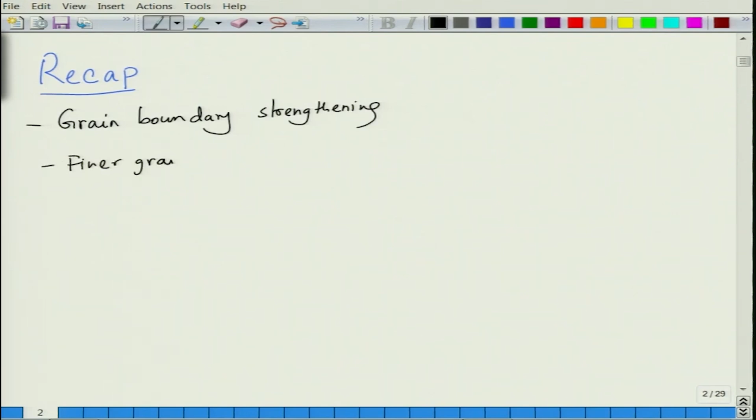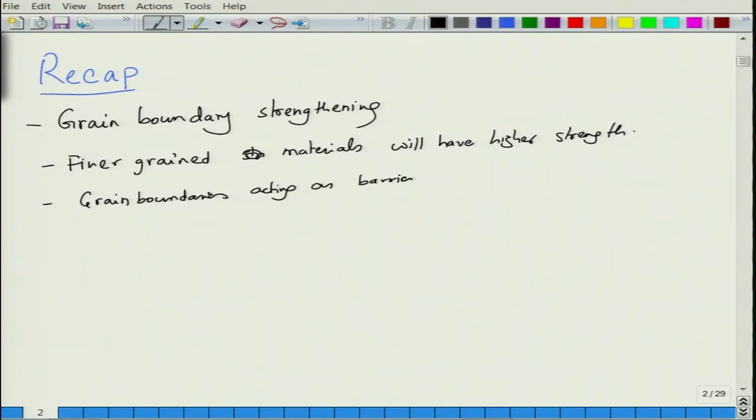In the last lecture we talked about grain boundary strengthening, in which we said that finer grained structures, finer grained materials or metals will have higher strength, and this is because grain boundaries act as barriers to dislocation motion.

This is because when you have a grain boundary, and if you have a dislocation moving on this slip plane, the dislocation does not find a continuous slip plane. So the slip plane in this case could be like this, but the dislocation does not find a slip plane, it has to go from there to there, and that does not happen because they are not continuous. As a result there is a discontinuity in the slip plane.

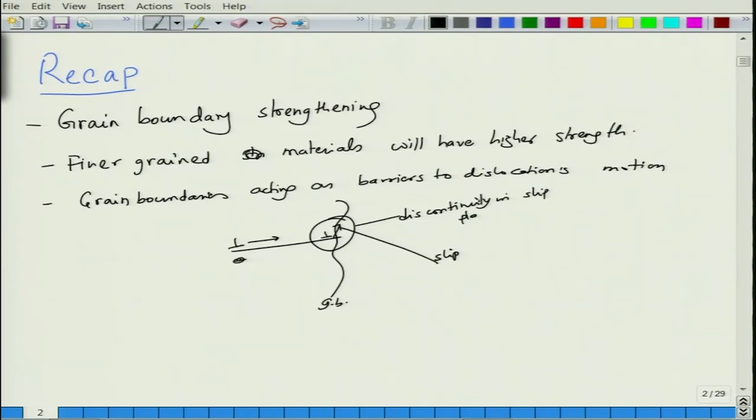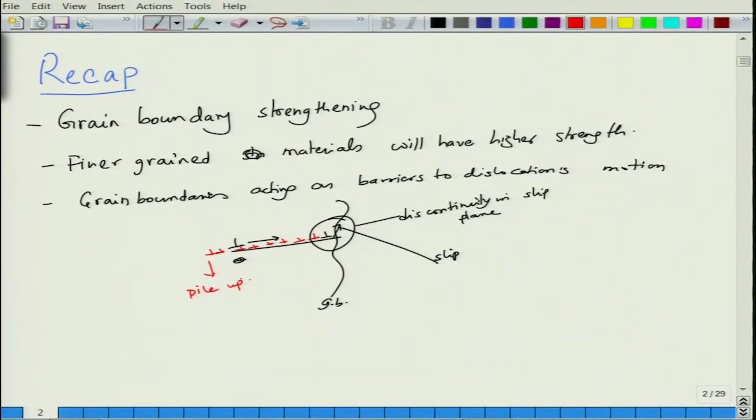Also, even though it was continuous, it could have been at a different angle, so the resolved shear stress could have been different. Basically this leads to, if you keep doing it, a pile up of dislocations here like this. This pile up again leads to increase in stress because you are piling up similar dislocations, so there will be repulsion between the dislocations as well, and this leads to strengthening.

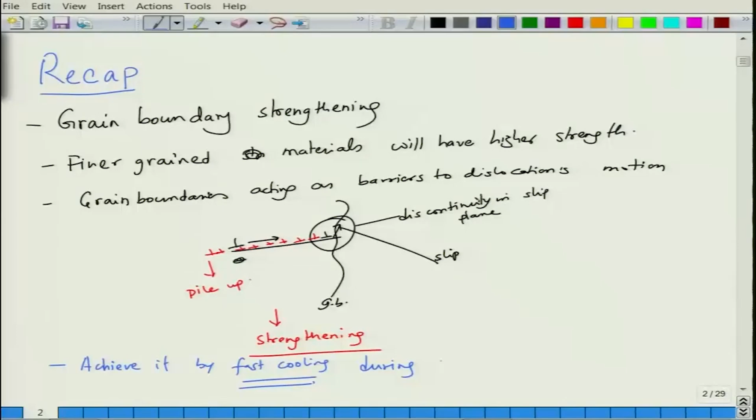This is a simple way of carrying out strengthening in metals, and you achieve it by fast cooling the materials. Fast cooling during heat treatment or solidification can lead to a finer grain structure during solidification or thermal treatment.

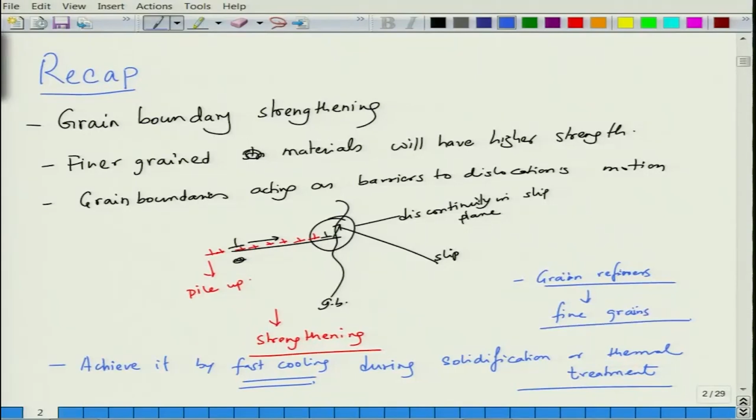This is a very effective way of strengthening materials, and you can also add things like grain refiners, which we did not discuss. Grain refiners are basically second extra elements which are added to a molten material, and they increase the nucleation rate and decrease the growth rate, which can also lead to finer grains. There are different kinds of grain refiners for different materials that you can find in literature.

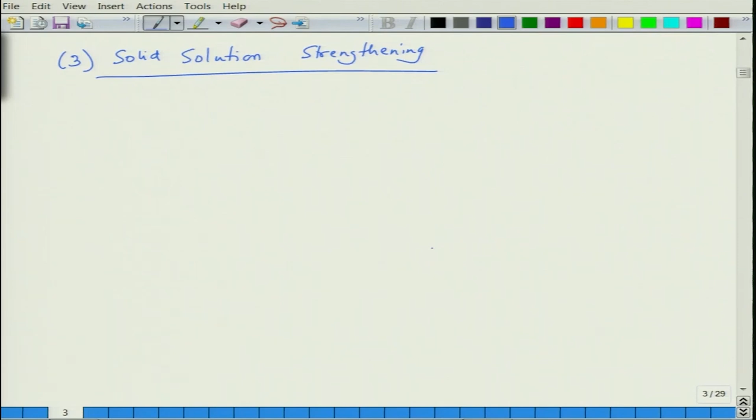Now, the third method of strengthening is called solid solution strengthening. Basically here, we know what solid solutions are. Solid solutions are a mixture of

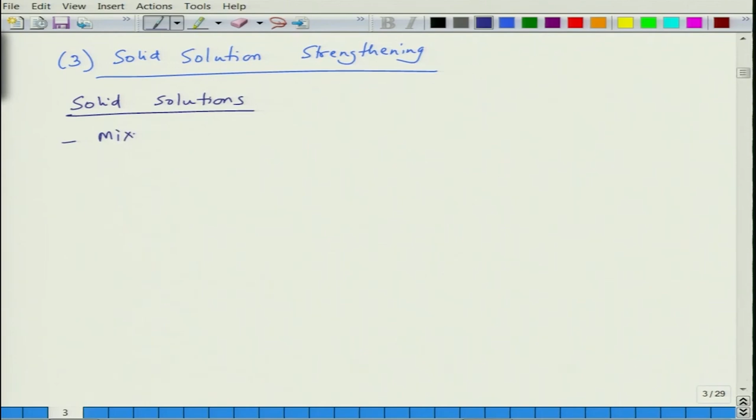two or more elements, and generally one would be the base, in larger concentration than the other. So one of them is the solvent or base. It is not liquid form, so solvent is not a very good term, let us say base matrix, and the other one could be the solute.

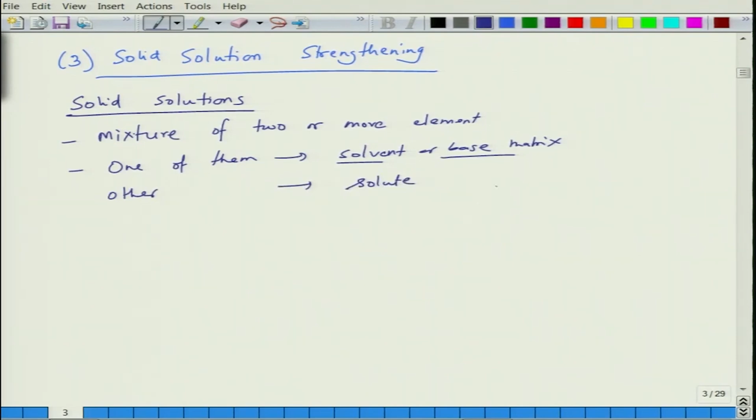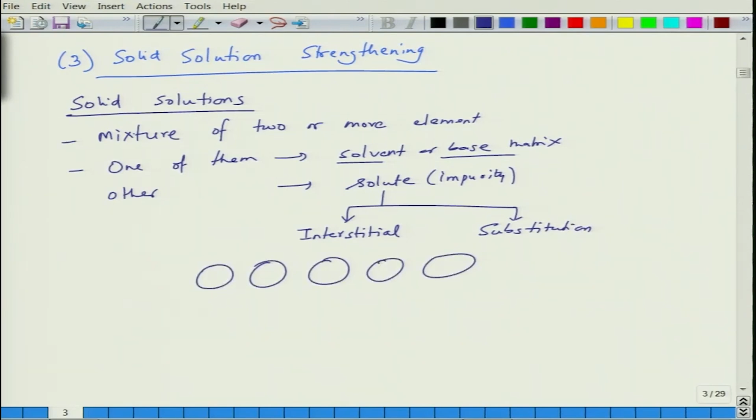The solute atom could be present in the form of, depending upon the size, interstitial. Basically this is an impurity, or it could be substitutional. Let us say if you have this kind of host atoms, in larger concentration generally.

Now, let us say in this host, the blue ones are host atoms. Let us say we have a red atom here, which is the impurity, and if the size of the impurity is such that it cannot go into the interstitial sites, then it makes a substitutional impurity if it occupies the host atom site.

On the other hand, we can have this other type. If the impurity is small, it can go and sit in the interstitial site, so this could be an interstitial impurity. So these two kinds of solutes will give you a substitutional solid solution if the impurity atom occupies the host site, or it is interstitial if it is in one of the interstices.

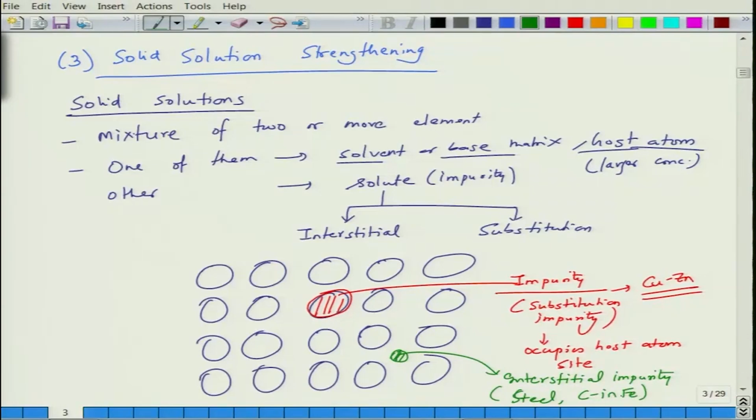One example of substitutional solid solutions is copper-zinc, which have roughly similar sizes, so they make a substitutional solid solution. An interstitial solid solution could be steel, where you have carbon in iron. Carbon is a smaller atom, so it goes to interstitial sites in iron. These are two examples of solid solutions.

Now, what this does is basically when you have a structure like this, these are host atoms. So if I put an interstitial impurity which is slightly bigger than the size of the interstices, it is going to displace these host atoms. So this is the interstitial impurity.

What an impurity does is it displaces the atoms around it in order to be accommodated. So this is the impurity, and it displaces these host atoms around it. Basically the matrix was like this.

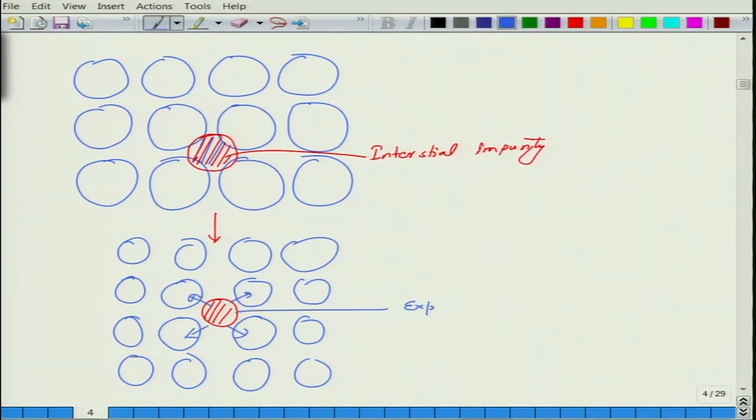If I make it a little smaller, that will make it better. This basically leads to expansion of the lattice here, to accommodate a slightly larger interstitial.

This leads to local dilation, so as a result it is going to stretch. What it does is create, within this region, compressive stresses to compensate for that as a counterbalance force. Basically it creates a distortion in the lattice, and this distortion leads to compressive stresses.

Similarly, it can happen in solid solution also. If you have a bigger atom here, let us say a substitutional atom, it again pushes the neighboring atoms away, and again creates distortion. So it could be a bigger atom or a smaller atom, depending upon the type of atoms, it can lead to distortion of the lattice. Depending upon the size of the solute, you will have distortion in the base lattice or host lattice.

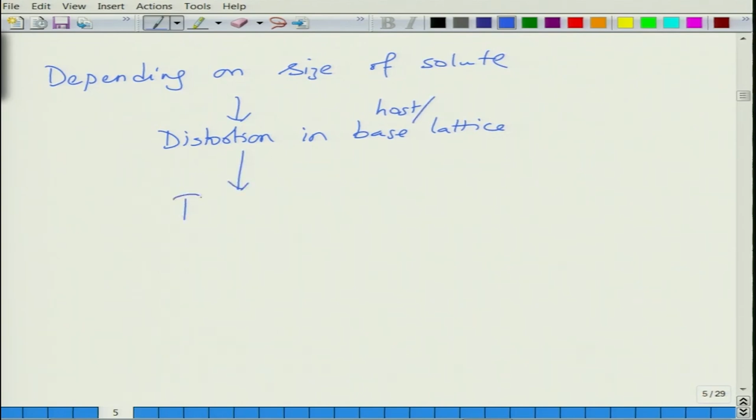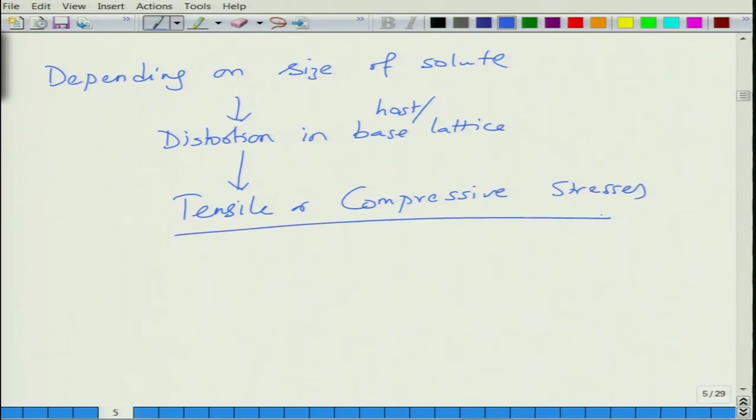This gives rise to tensile or compressive stresses. So basically you strain the crystal.

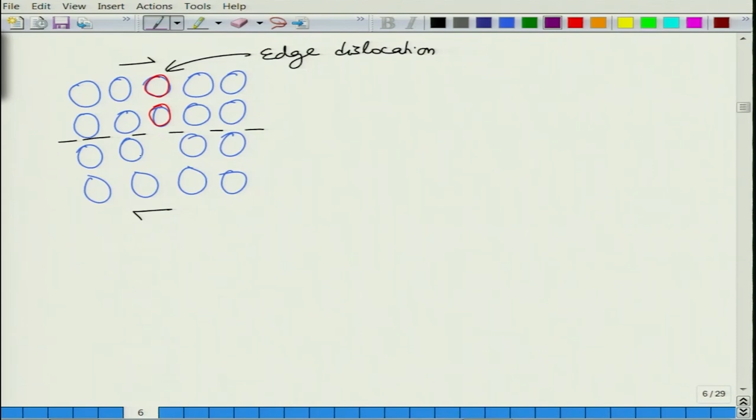When you apply stress, it will try to move to the right to relieve the stress and get out of the crystal. Now, let us say in the vicinity, when this dislocation moves, I put an impurity atom which is slightly different, so we can see that this part of the crystal is under compressive stress and this part is under tensile stress.

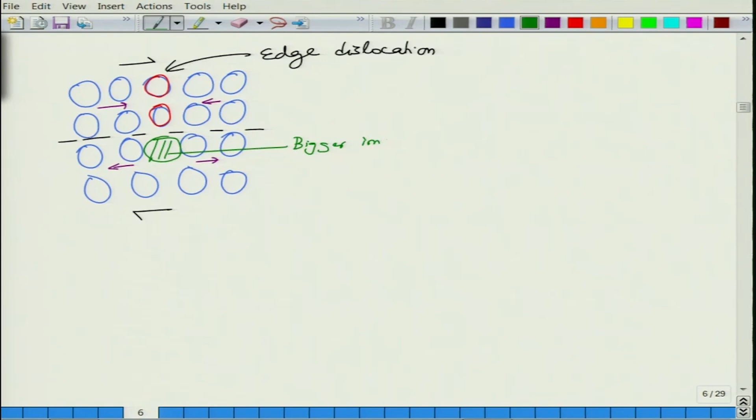So what I do is put an impurity here which is bigger, a bigger impurity, and the bigger impurity will dilate the lattice. If I do that, the situation that emerges is like this, with this being the bigger atom.

You can see the top portion was under compressive stresses, the bottom was under tensile stresses. Now, having put this bigger atom, you have expanded the bottom part, so the stresses in the top and bottom parts counterbalance each other. Basically the dislocation has now become attached to the impurity.

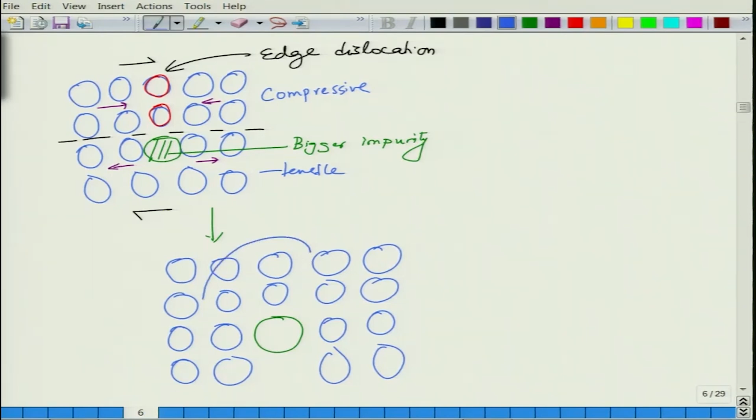So this dislocation becomes more stable, because now it has become attached to this impurity, since the stress field is reduced. Because presence of a solute nearby reduces the stress field, as a result you require more stress to move it, because it has become stabilized with the presence of the impurity.

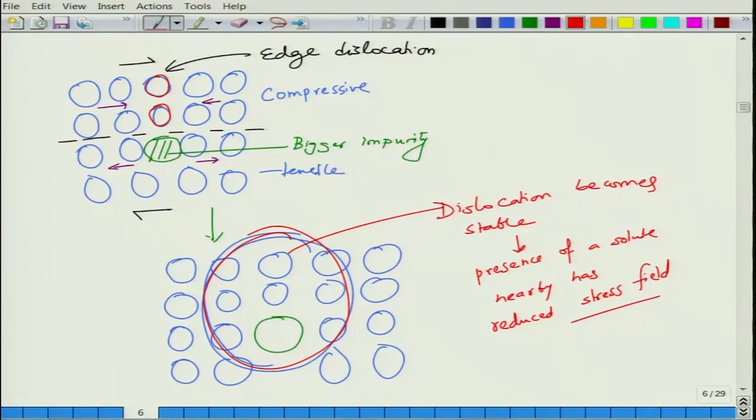This is basically what we call solid solution strengthening, where the stress required to move the dislocation has increased because the impurity reduces the stress field around the dislocation by compensating the stresses. Earlier you had tensile stresses; when you put in this bigger impurity it introduces compressive stresses, so the stresses become lower and the dislocation does not feel the need to move out of the crystal. So you require higher stress to move the dislocation further. This is called solid solution strengthening.

It can happen by way of both impurity atoms, whether substitutional or interstitial impurity atoms. Besides this, the impurity also brings another change, that is a change in the bonding environment, because earlier you had AA kind of bonds, and now this leads to AA and AB kind of bonds.

And if AB bonds are stronger than AA bonds, then you will have a change in the elastic modulus, and this again can increase the yield stress.

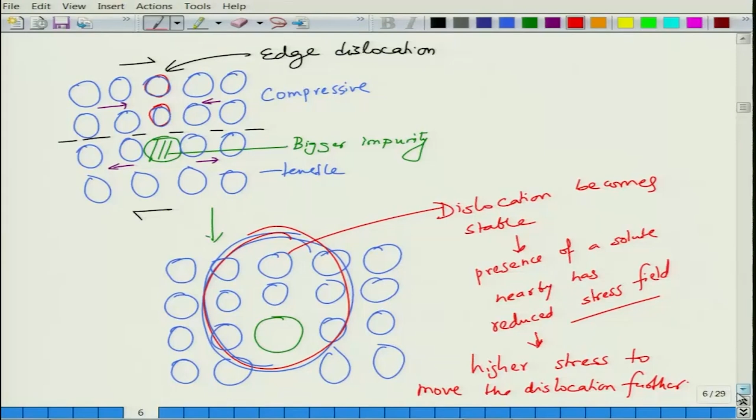So there is a critical concentration up to which the effect will be valid. Basically, addition of impurity atoms, substitution or interstitial, can stabilize a dislocation by compensating the stress fields, making the dislocation more stable, and hence you will require larger stress to move it, depending upon its size, of course.

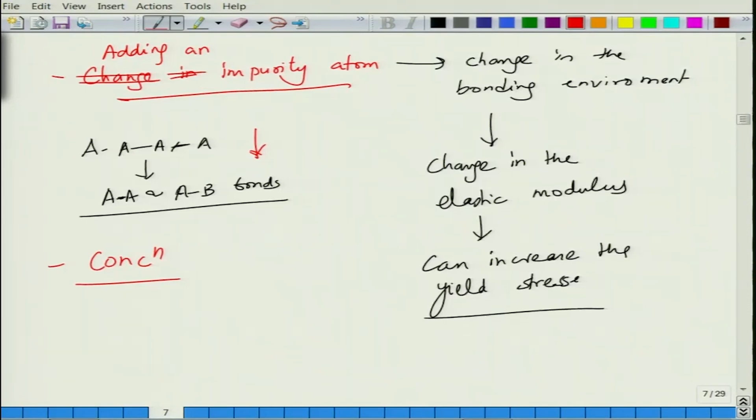Then adding an impurity atom also causes a change in the bonding environment from AA to AB kind of bonds, and if the AB bonds are stronger than AA bonds, the elastic modulus will change, and you can change the yield stress. And of course it depends how much solute atom you add to the host.

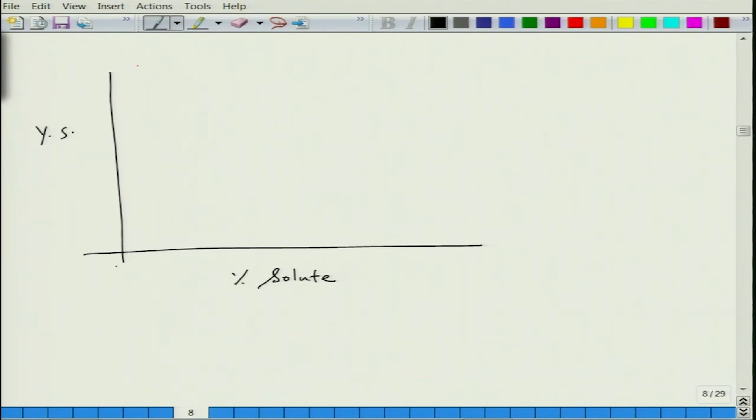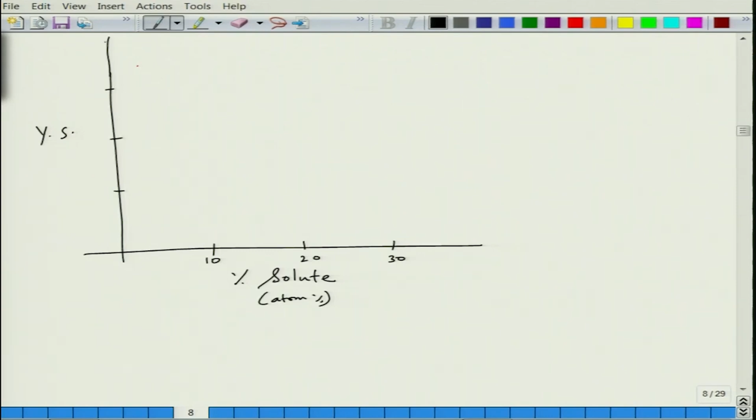There are people who have studied this. So if you plot, for example, yield strength as a function of percentage solute addition, let's say this axis is atom percent: 10, 20, 30, and this axis is in MPa: 50, 100, 150, 200. Here the base matrix is copper, and copper has a radius of 1.28 angstrom.

So in the case of copper, if you look at zinc, zinc creates some strengthening up to about 30%, and zinc is about 1.31 angstrom. So zinc has a certain solid solution strengthening effect.

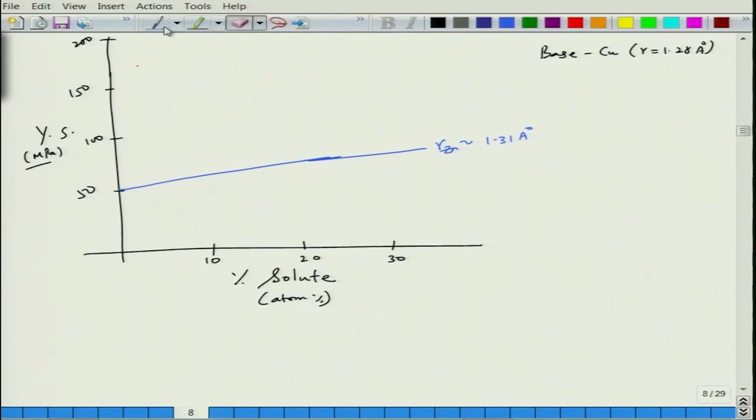If you look at nickel to copper, that's a very good example. Nickel to copper can lead to higher effects, increasing the values up to about this point. Nickel size, R nickel, is 1.25 angstrom, very similar to copper. In fact, they make a nice substitutional solid solution which is an isomorphous system.

So it makes an isomorphous system, remaining FCC all the way, whereas copper with zinc makes brass, which has limited solid solubility. After this it forms second phases and so on and so forth.

And then we have silicon. You can also add silicon to copper, and silicon to copper will have certain solid solubility. Silicon is about 1.18 angstrom.

Then we have beryllium. You have beryllium bronze where you add beryllium to it. Beryllium is about 1.12 angstrom.

And you can also add tin, which has limited solid solubility. Tin can increase the strength quite substantially. R tin is about 1.51 angstrom.

So you can see that the predominant effect is that you can add a little bit of tin to copper and increase the strength from 50 to nearly 200 megapascal, a 4 times increase in strength. You don't have to add a lot of tin. However, tin has a larger size compared to copper, so you can't add a lot of it.

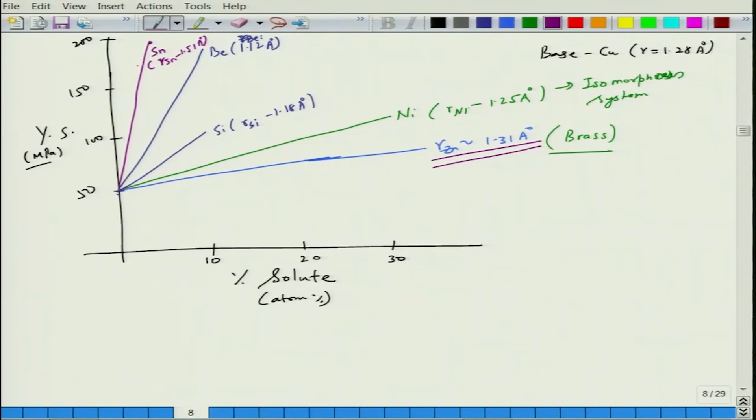And then tin, you don't have to add even 10% — tin goes all the way up to about 170, 180, maybe 200 megapascals. So these are the effects of adding solute atoms to, for example, copper, which leads to substantial strengthening in copper. This is a fantastic way of strengthening.

And that is how most materials are strengthened. So you can strengthen by grain boundary strengthening, you can strengthen by work hardening, but you can also strengthen them by adding these foreign atoms — basically adding solute atoms.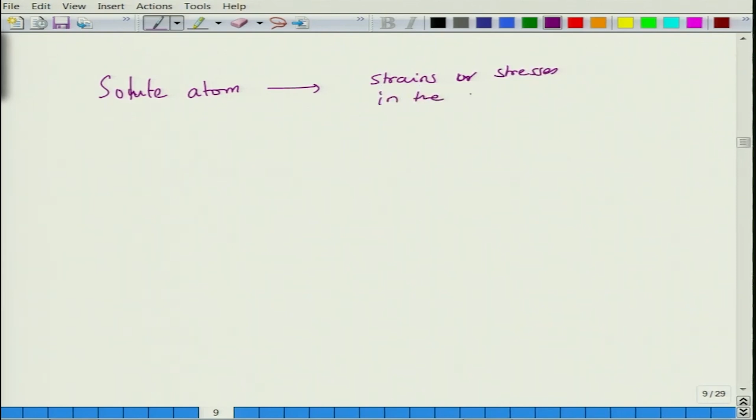In summary, solute atoms create strains, or you can say stresses, in the neighborhood, and this creates an obstacle to dislocation motion, because dislocation may get stabilized by coming there, and as a result you make a stronger crystal.

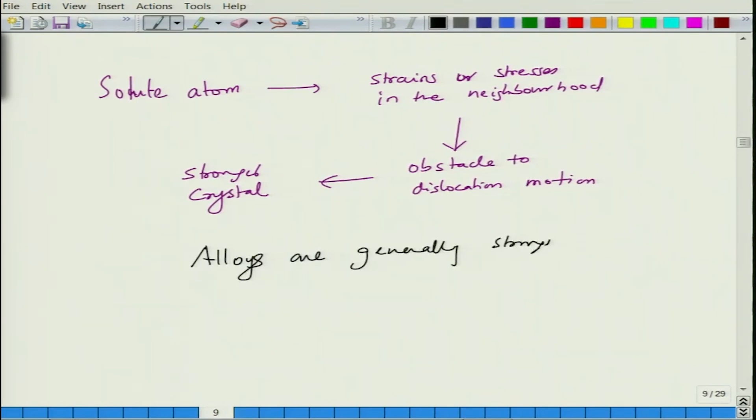So this is why generally alloys are generally stronger than pure metals. For example, pure gold is very soft.

That is why you can't have jewelry made of pure gold, it's never 24 karat. If gold is very soft, all the jewelry will deform itself very easily. So you add a bit of copper, and the AuCu alloy

is harder. It also provides a nice color to it, and this is what is used for jewelry. So you have 18 karat, you can have 22 karat, and so on and so forth. This is because of addition of copper to gold, and this is true for every alloy.

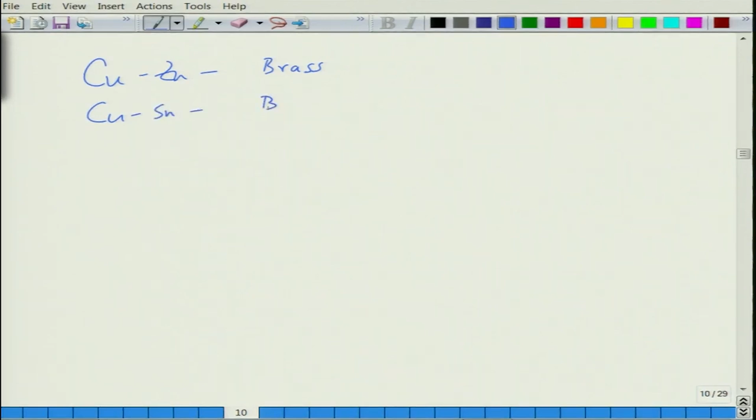So you have copper-zinc, which is brass, copper-tin, which is bronze. These basically increase the strength of pure copper.

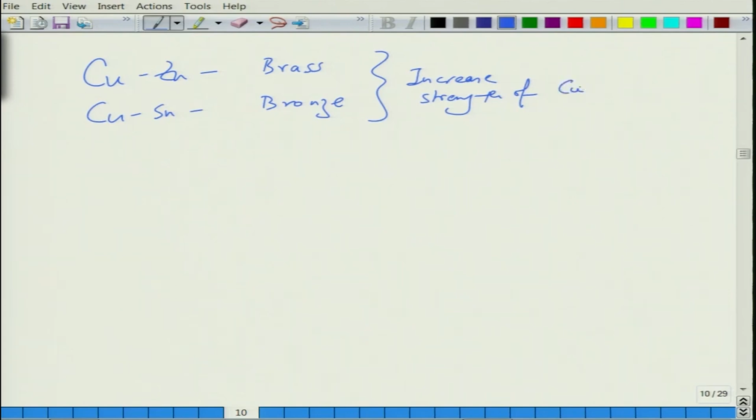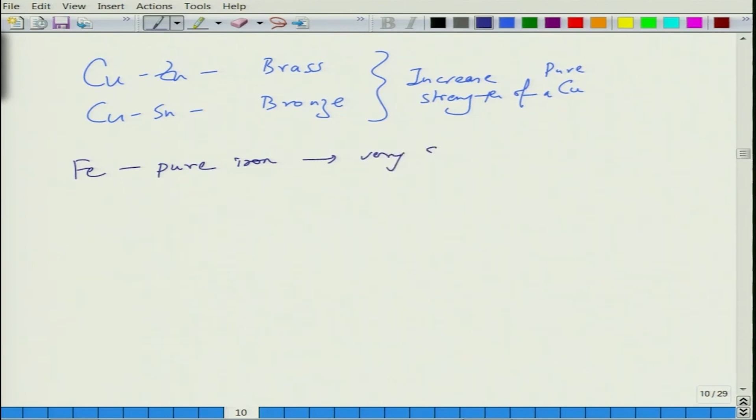Similarly, iron, pure iron is very soft, but that is why if you add carbon to iron, less than 2% of carbon makes steel, which is very strong.

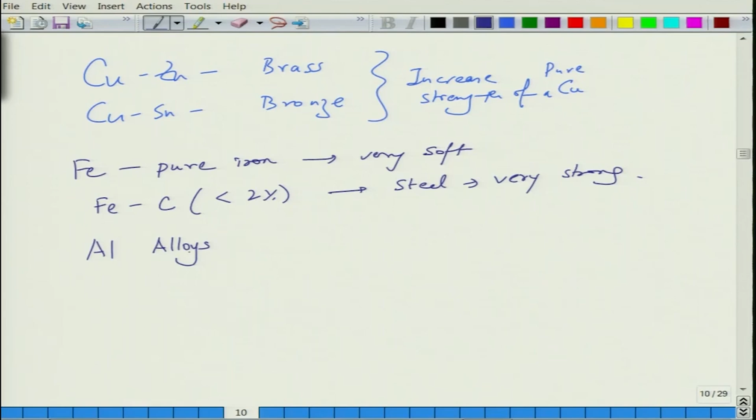This is also true for, let's say, aluminum alloys. Aluminum can have a lot of elements, like copper, magnesium, and others. Similarly, you can have titanium alloys, magnesium alloys. These are all engineering alloys.

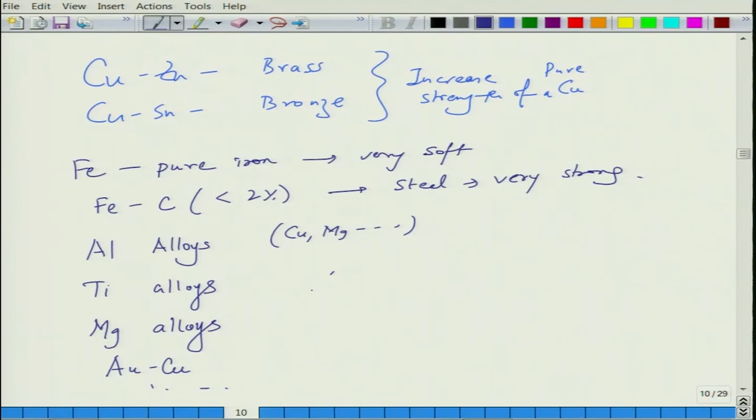We saw gold, AuCu, and so on. Essentially, addition of a smaller amount of impurity atoms to metals leads to an increase in the strength of these metals, making them stronger and useful for engineering applications, because things like aluminum and magnesium in pure form are very soft, so they are not extremely useful for a lot of engineering applications. However, when you add these impurity atoms, they become harder.

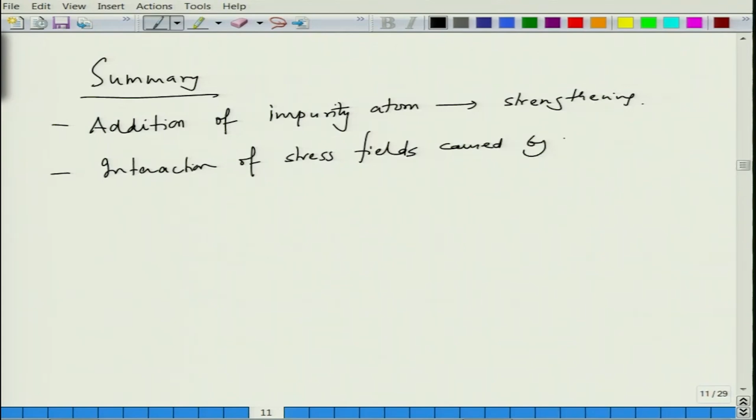So, to summarize: addition of impurity atoms causes strengthening. This could be because of interaction of the stress field caused by them with that of dislocations.

So this is the first mechanism, making it harder for dislocations to move. The second mechanism is, as we said, a change in elastic modulus.

So in the first case the modulus could be like this, and in the other case the modulus could be like this—this is sigma versus E. So this is a change in sigma Y. A change in E causes a change in sigma Y. So this is another way of increasing the strength of these materials.

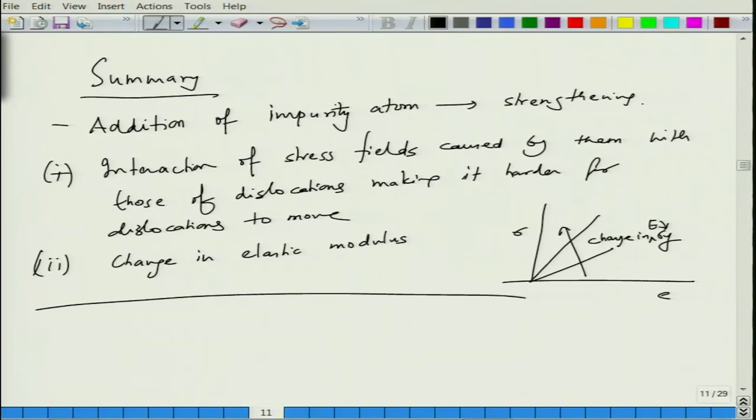And this is something which is done in the engineering industry on a routine basis, where we add these alloying elements to make the materials stronger.

Now, the next thing we are going to study is, if you do not form second phases—let's say pure metals, and let's say we talk about alloys—in alloys we can do strain hardening, we can do grain refining,

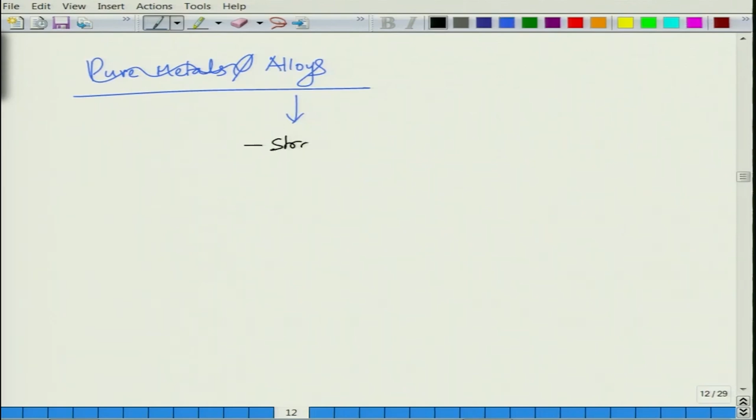and we can do solid solution hardening, and all three of these mechanisms can work together, or you can make them work together or individually. Depending upon how much improvement you want, you can employ all three of them and make the materials stronger, or you can use either one of them to make the material stronger without forming a second phase.

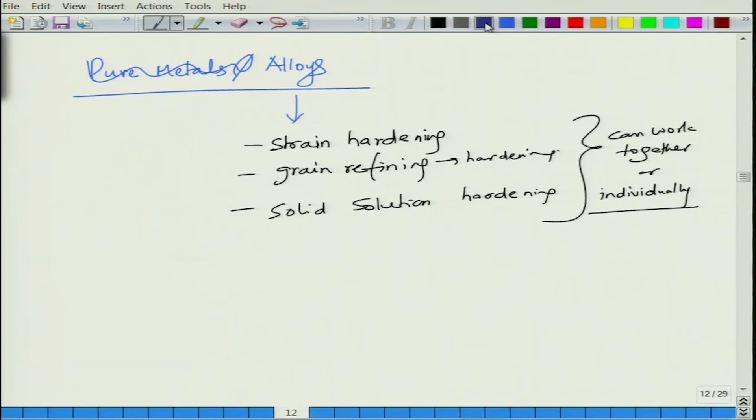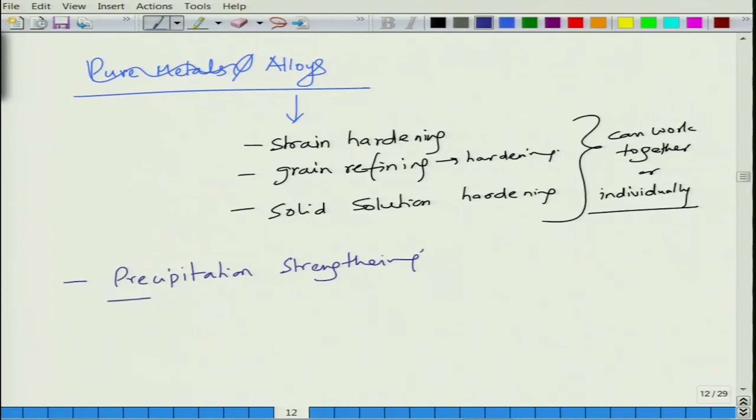Now, the next and last category we will look at is precipitation strengthening. Precipitation strengthening is basically addition of impurity, addition of solute atoms, to form a second phase which is stronger, and this causes a hardening or a strengthening, and this is what we will look at in the next lecture.

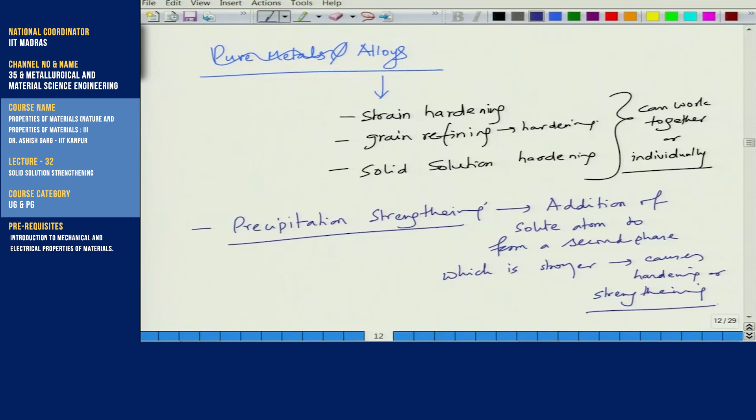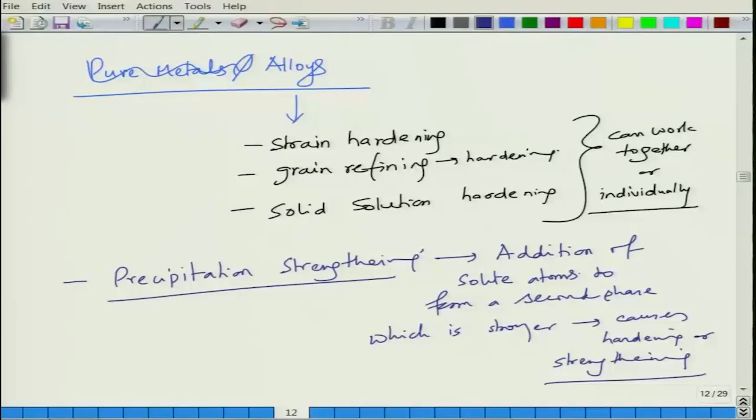In the next lecture, which will be the last lecture on mechanical behavior of materials, we will look at precipitation strengthening, where addition of solute atoms to the base lattice, to the base material, will form the second phase, and depending upon how you form that second phase—if it is harder—it can cause strengthening of materials. This is very common for aluminum-copper alloys, aluminum-magnesium alloys, and even steel. We will see that in the next class. Thank you very much.